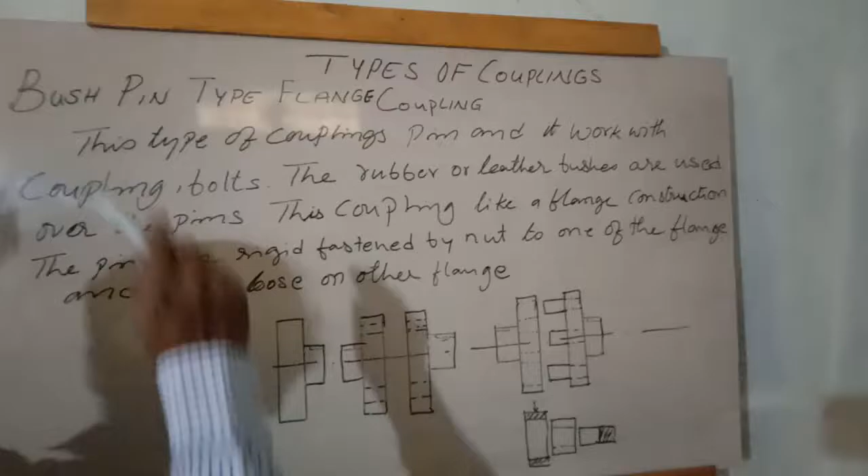This is the bush pin type flange coupling. As I told before about flange coupling, this is the same like a flange coupling, but extra bush and pin are added to the flange.

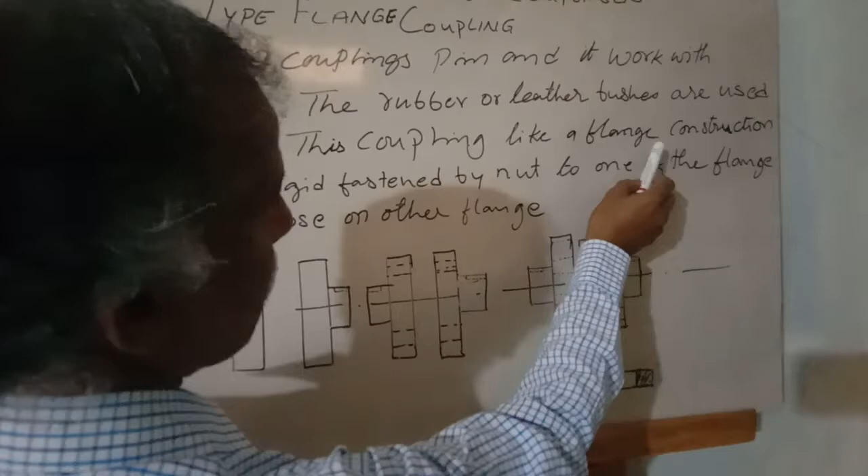This type of coupling works with coupling pins and coupling bolts. The rubber or leather bushes are used over the pins. In this coupling, like a flange construction, the pins are rigidly fastened by nut to one flange and kept loose on the other flange.

This coupling is like a flange coupling, same as a flange coupling with keyway and everything. To fasten these two flanges, to accommodate nut and bolt, we have 4 holes to tighten the two flanges with nut and bolts.

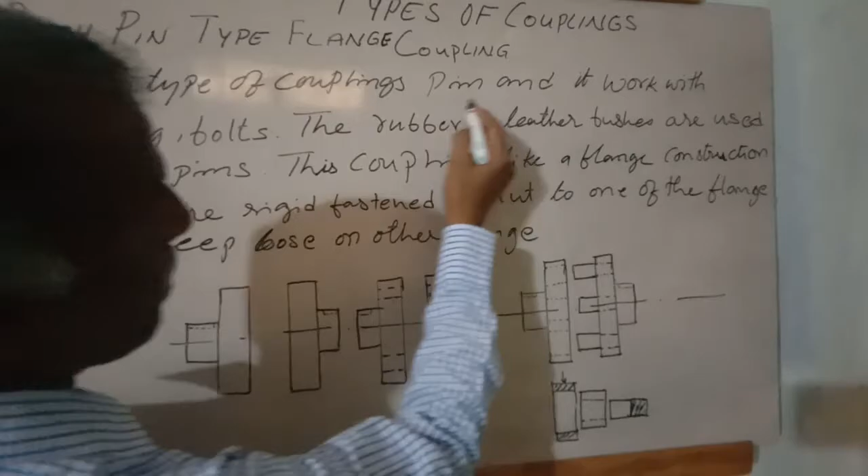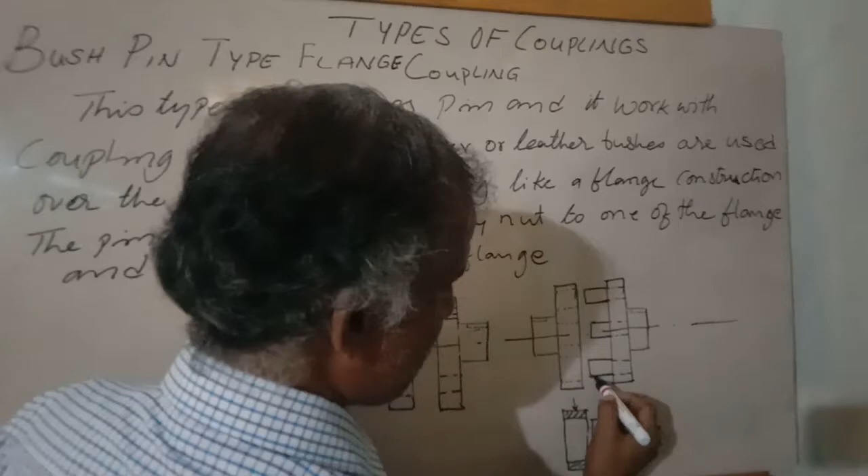This type of coupling works with coupling pins and coupling bolts. Here, excluding the nut and bolt holes, there are 6 more holes for one flange, which have more diameter than this pin. For one flange we have 6 holes of bigger diameter than the pin diameter. The other flange has 6 pins which are fastened into the flange with a thread system.

These 6 pins are fastened to this flange by a thread system. So for one flange we have 6 pins, and 4 holes to tighten the two flanges. These 6 pins will enter into the holes on the other side of the flange.

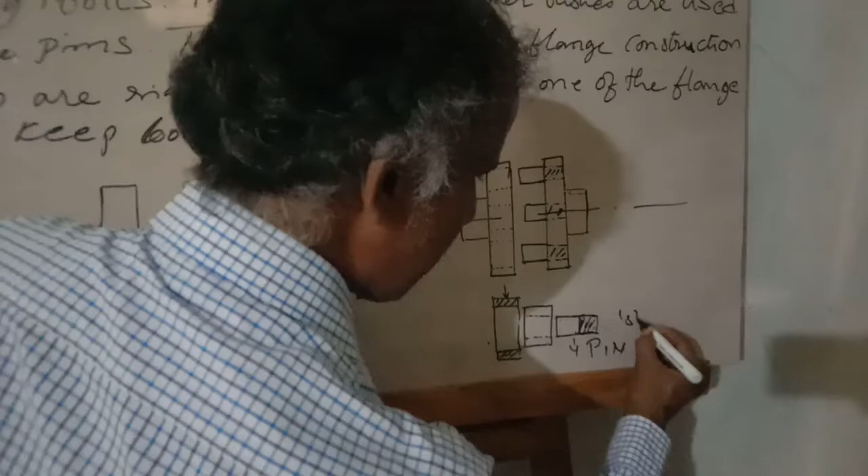This flange hole is small - this is a pin, this is a pin. This is the first flange, and the second flange has a hole wider than the pin, which accommodates the bush.

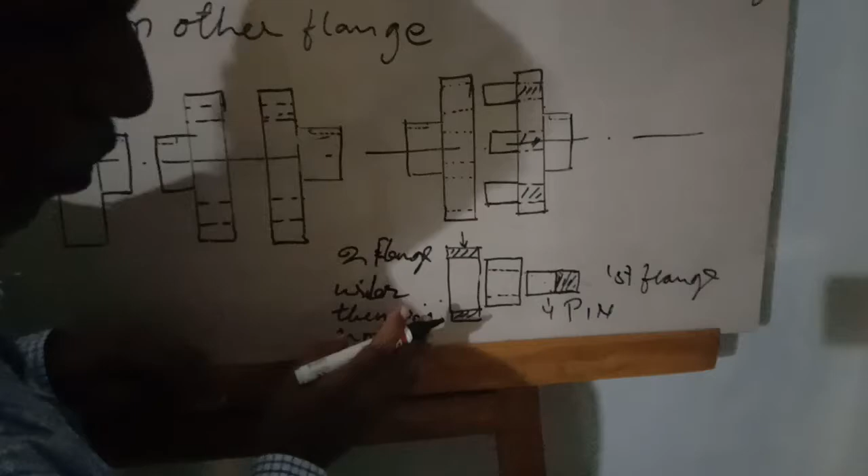This hole has more diameter than the pin - it is very loose, with some clearance in between. To fit this clearance without gap over the pin, we insert a leather bush or rubber bush. This will be slightly undersized to the pin. The pin has a chamfer at the start, so by pushing it will enter into the bush.

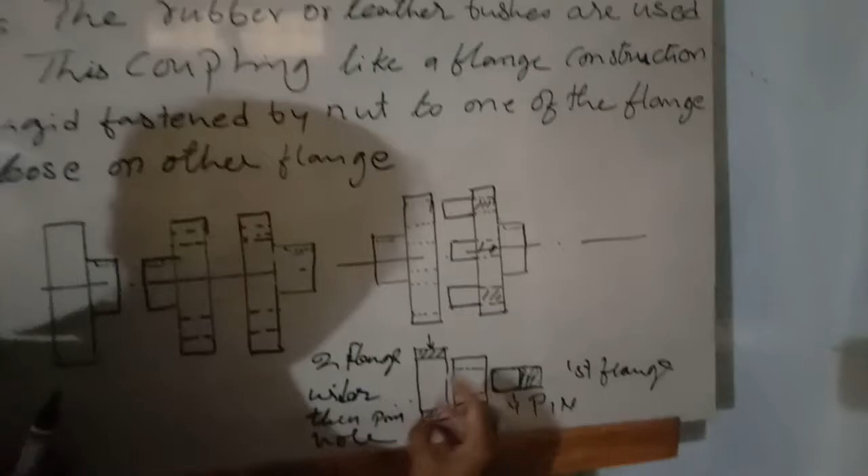Here is the first flange after fixing the shaft on either side. Now we will fix the rubber bush or leather bush over the pin, and with this bush it will enter into this hole.

It will enter into these holes without any clearance, because this leather and rubber has elasticity, and it will fit. These two flanges are fitted with nut and bolt.

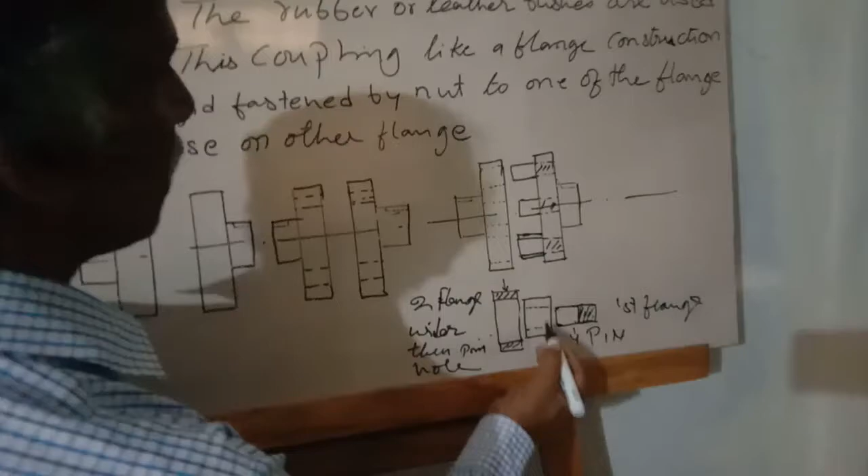This bush pin type of flange is used where slight misalignment of the shaft axis takes place. It will automatically adjust due to the cushion of the rubber and leather, bringing it into line with the shaft axis. Then we put nut and bolts, checking and tightening. After tightening, even if the alignment is slightly different, when running it will get self-aligned due to the cushioning of the rubber and leather.

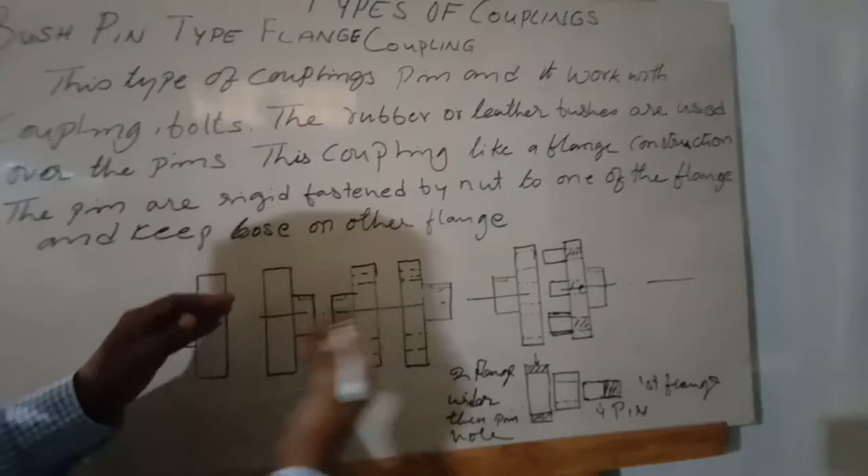So this bush pin type flange is nothing but a flange which has pins, and the other side of the hole is bigger size to accommodate the bushes. This is one type of coupling - the bush and pin coupling.

Now this is chain coupling. In this chain coupling, the two sprockets on the two flanges are driven by the chain system - that's why it's called chain coupling. The flange replaces a sprocket on each shaft.

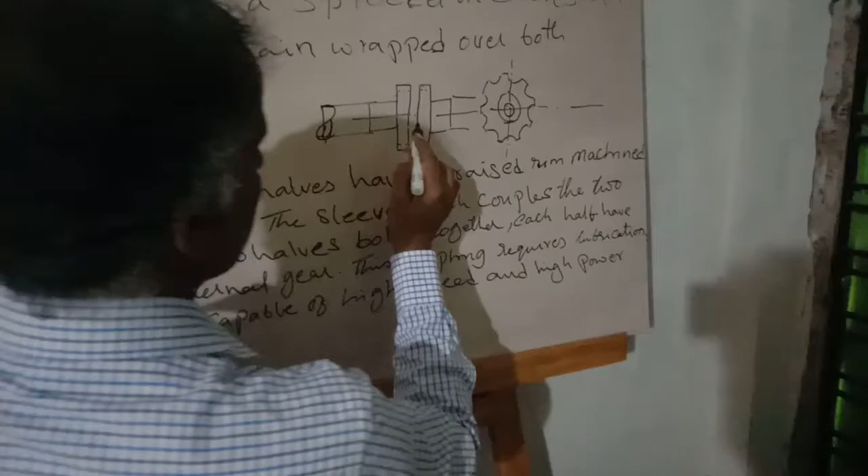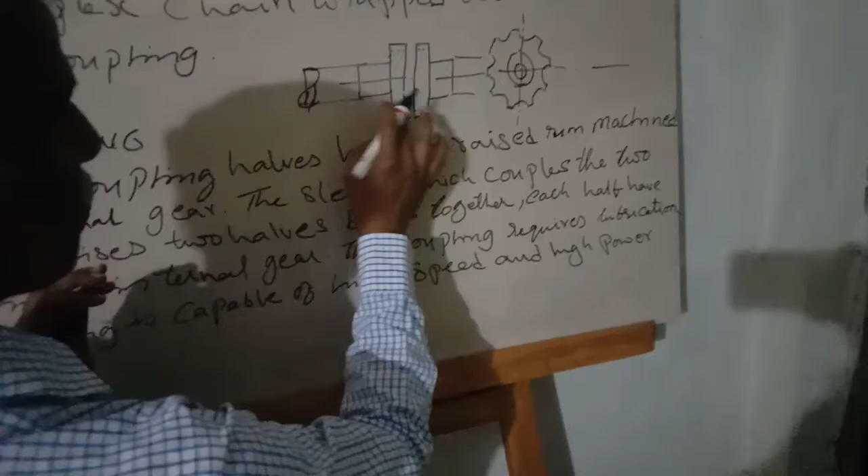When you fix the shaft to this flange on both sides, this flange is in the shape of a flange, but at the end of the shaft, excluding the holes and all, this flange's outer diameter is made like a sprocket, a chain sprocket - for example, like a cycle's crank wheel and backside sprocket. This sprocket is made integral with the flange, on both flanges.

After that, the shaft is fixed and the sprocket is brought nearby. After aligning these two shafts, the flanges which replace sprockets on each shaft are wrapped over by a duplex chain, covering both adjacent couplings - side by side couplings are called adjacent couplings.

Here, duplex means it's like a cycle chain - a single length chain. But in a duplex way, it's a single chain that accommodates two sprockets at a time.

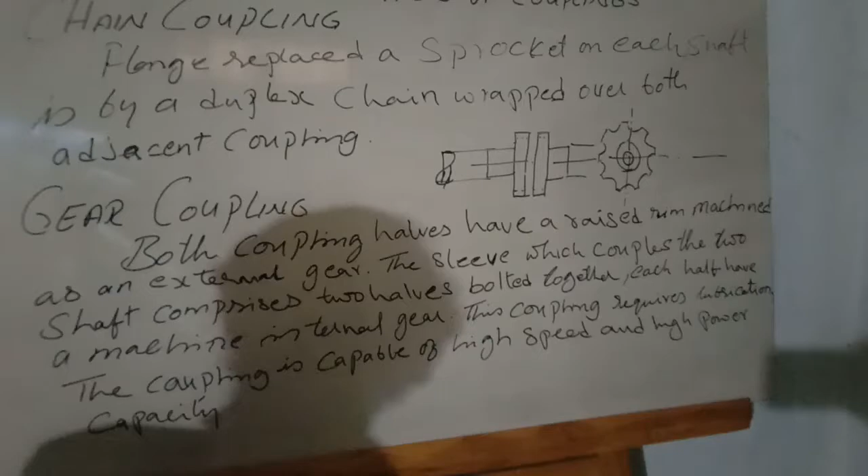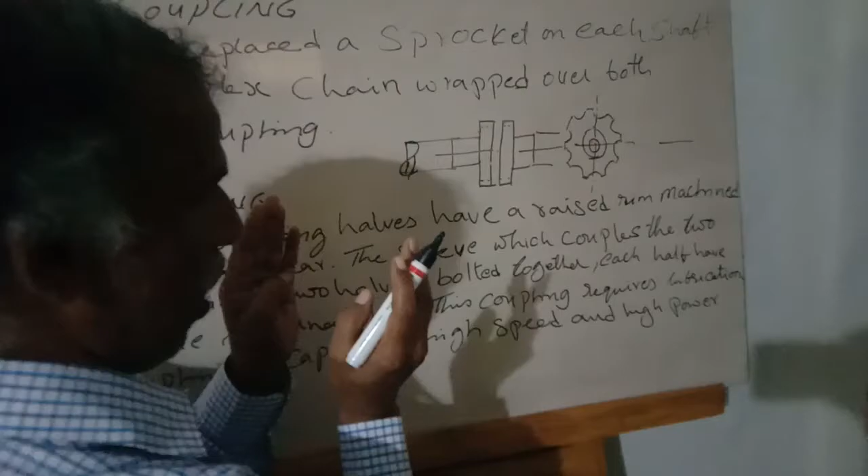This cycle-like chain is exactly wrapped over the sprocket without any looseness or interference - exactly fitted, link by link. Over this sprocket, under the cover, everything is fixed. After fixing this flange, a guard is placed over it like a safety cover, for oil seal, along with gaskets and everything - it is fixed.

It is filled with the lubricant, and it needs lubricant also when it is running. So when the prime mover is running, the secondary mover of the shaft also will run by joining the sprocket

with a duplex chain wrapped over both adjacent flanges. Now next one is gear coupling. In this gear coupling, both the coupling halves have a raised rim machined as an external gear. Let me draw a sketch here. This is a gear coupling. Both coupling halves have a raised rim machined as an external gear.

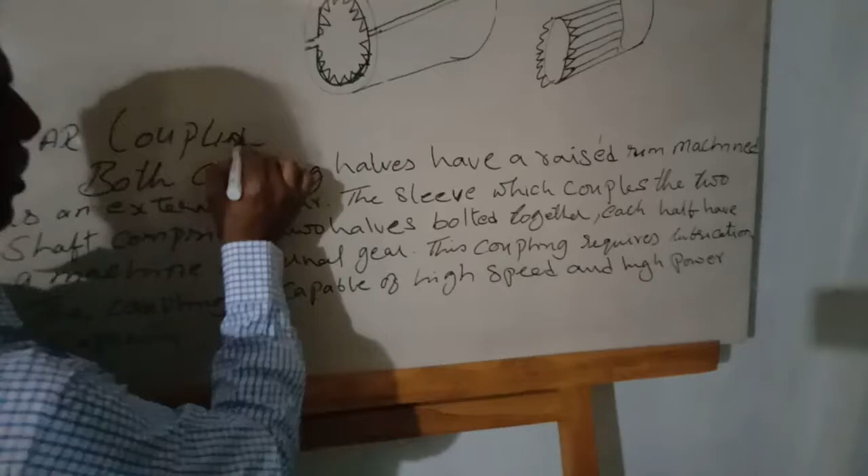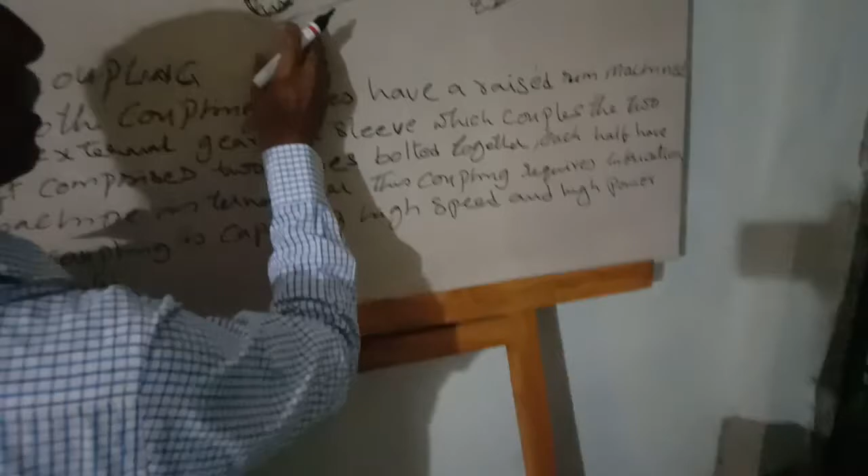So in this gear coupling, the two halves of this sleeve are a flange. If you want a flange coupling with gear, it will go to the muff or sleeve coupling. So this sleeve and muff inside, internal gear teeth are cut like a gear internally. The muff coupling's internal surface gear teeth are cut. Same way, the shaft we are connecting also has external gear teeth cut on it, like a spline shaft.

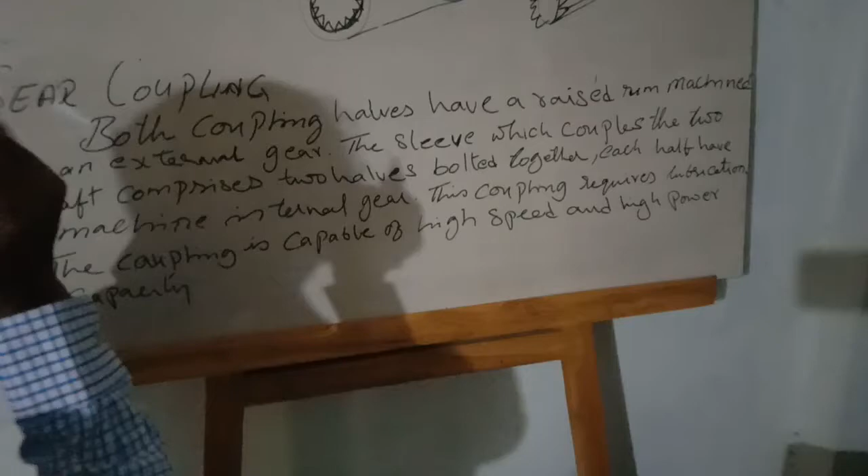This gear exactly meshes into this coupling. Now the first half is placed, and the two shafts are placed on either side. Then the top half is placed and crimped together with the nut and bolt. Compressedly it is fixed. Both the coupling halves have a raised rim machined as an external gear. The sleeve which couples the two shafts comprises two halves, bolted together with nut and bolt. It will crimp and compress the fitted bolts together. Each half has a machined internal gear.

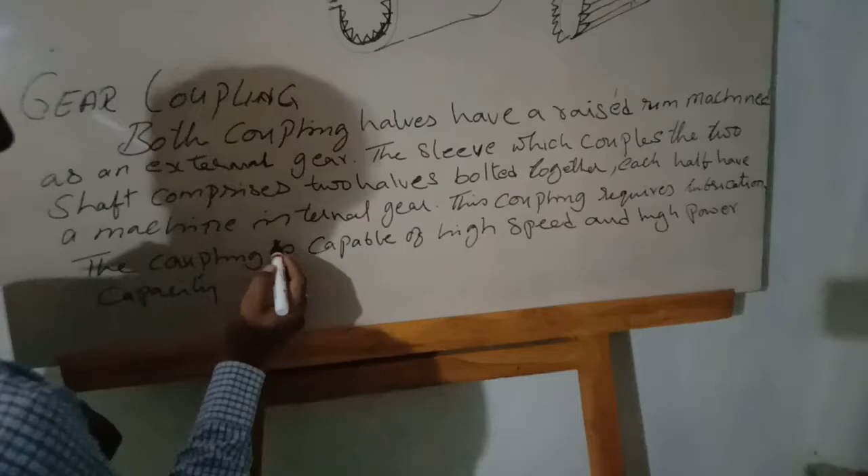This is the internal gear, this is the external gear. This coupling requires lubricant. The coupling is capable of high speed and high power capacity. This type of gear coupling has high capability, high speed and high power capability. There is no loss of slipping, and this is the gear type.

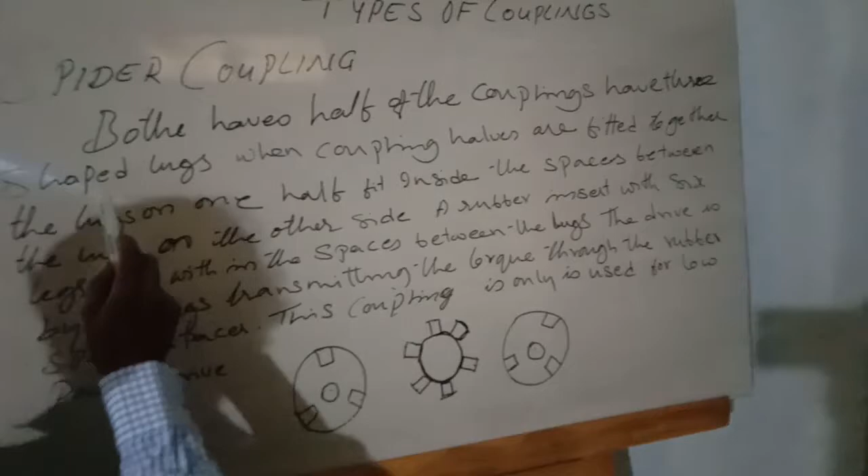Next one is spider coupling. Both halves of the coupling have three shaped lugs. See here in the flange, ordinary flange, like this, three lugs are made - 2, 3 lugs.

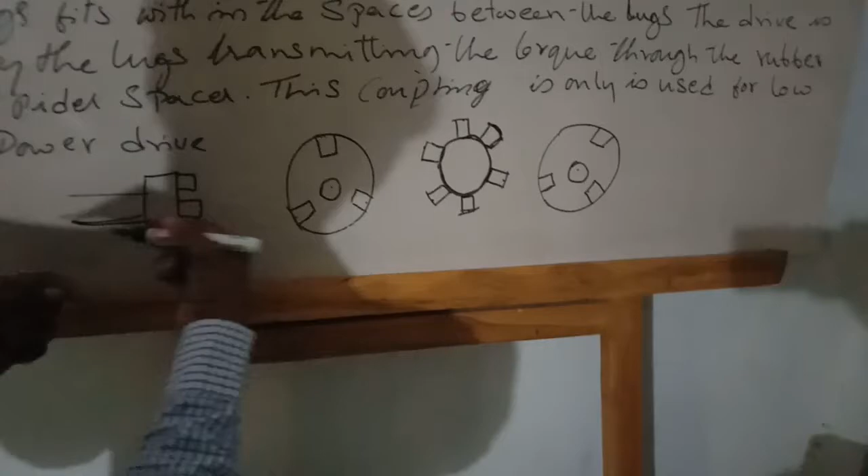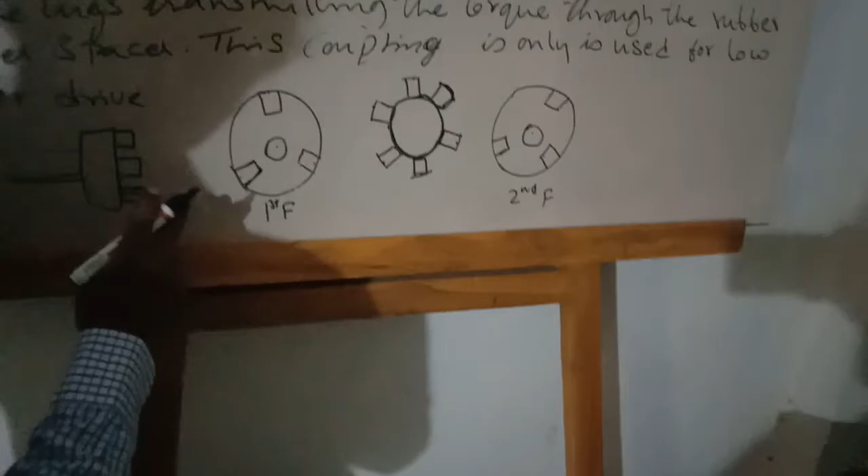The lug is made as an integral part, machined, not like a pin which we fit with a nut and bolt. It's an integral part of the flange. These are lugs, not pins. Pins are round in shape, lugs are a little bit square, tapered, like a sector from the center to bigger diameter. So for each flange, first flange, this is second flange. For each flange, 3 lugs are made. Both halves of the coupling have 3 shaped lugs.

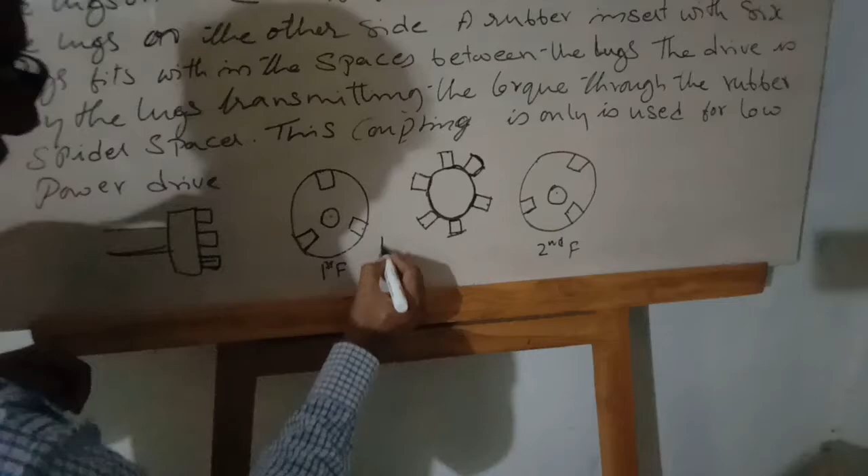When coupling halves are fitted together, the lugs on one half fit inside the spaces between the lugs on the other side. So when these two flanges come together, these lugs go in like this. After these lugs go inside, there will be a gap between corresponding lugs, same width as the lug width, example 10mm. This is also 10mm. When these two couplings mesh together, for each corresponding lug, there will be a space of 10mm. So after fixing these 3 plus 3 lugs, there will be a 6 space gap - 6 spaces will be there.

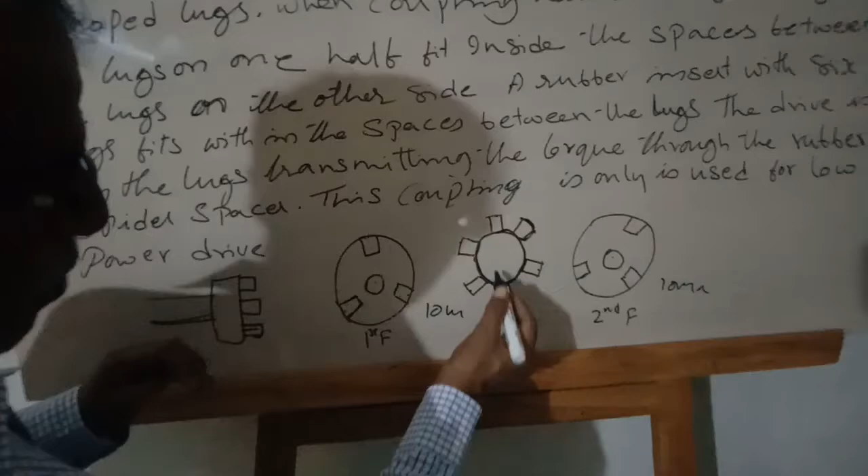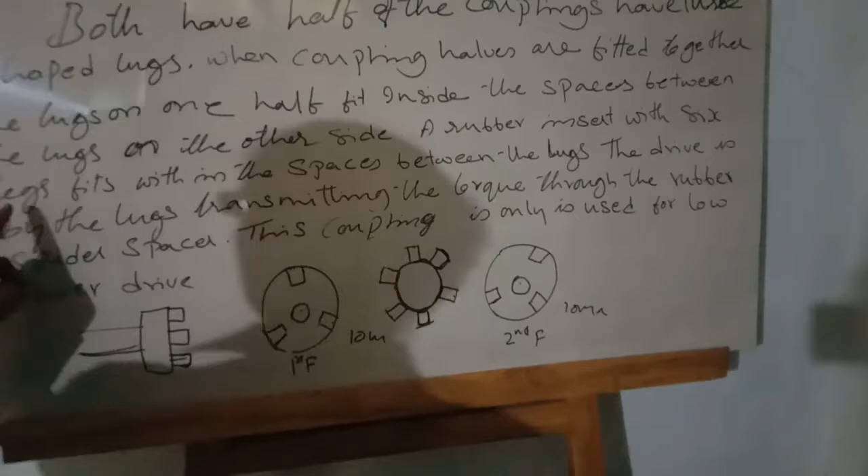With the same width of 10mm, a rubber mold is made with 6 lugs equally spaced. This 6 lugs exactly fit into this - see, this rubber fixes into this. After fixing this rubber lug, one touches the metallic lug. There will be a space of another 10mm, which fixes the other flange into that. So what is explained here: both halves of the coupling have 3 lugs, with spaces between the lugs on the other side. A rubber insert with 6 lugs fits within the spaces between the lugs. The drive is transmitted by the lugs through the rubber, transmitting the torque.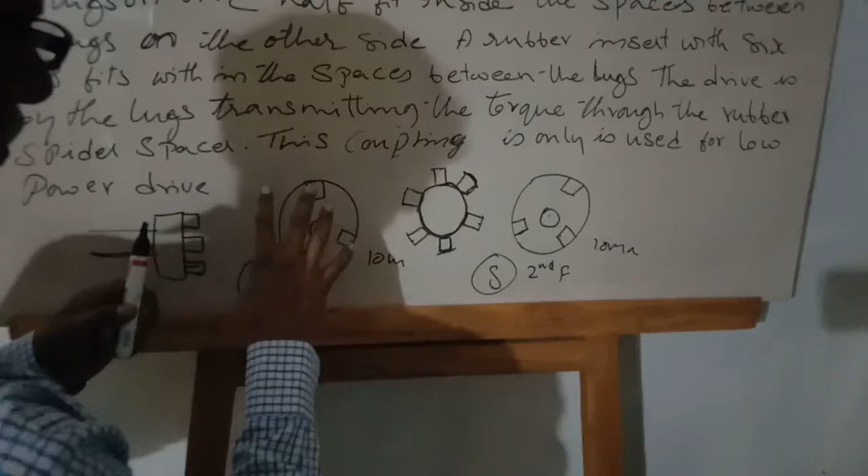So this is the prime mover, this is the secondary mover. When this one starts, it drives the rubber and the rubber drives this one. See this spacer, the rubber we fixed inside this insert, it is like 6 legs, like a spider. So it is called a spider coupling.

We can especially see this in our bikes - the latest model bikes that are coming, the rear wheel, when they open, the main shaft of the chain will turn the tire having the same fitting in the bikes also with this rubber and all.

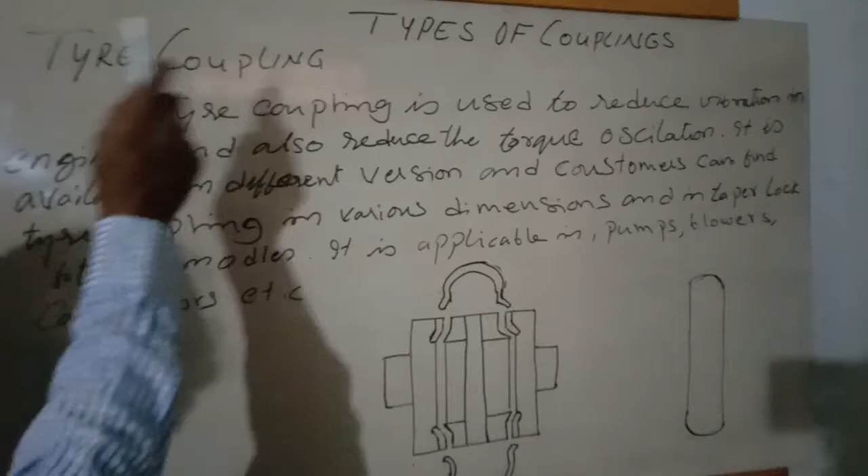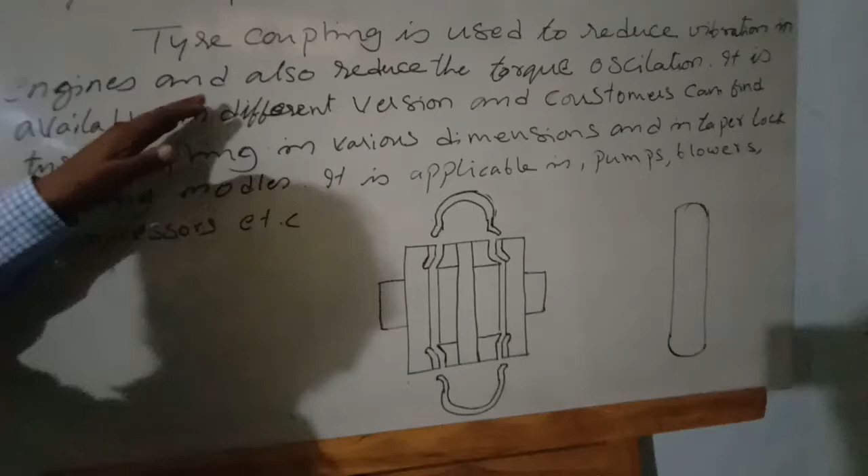A tire coupling is used to reduce vibration. Due to the tire rubber cushion system, it reduces vibration in engines and also reduces torque oscillation. What is torque oscillation? When running out of the center, if there is any difference between the axis, due to the torque, it rotates easily because it is out of the flange.

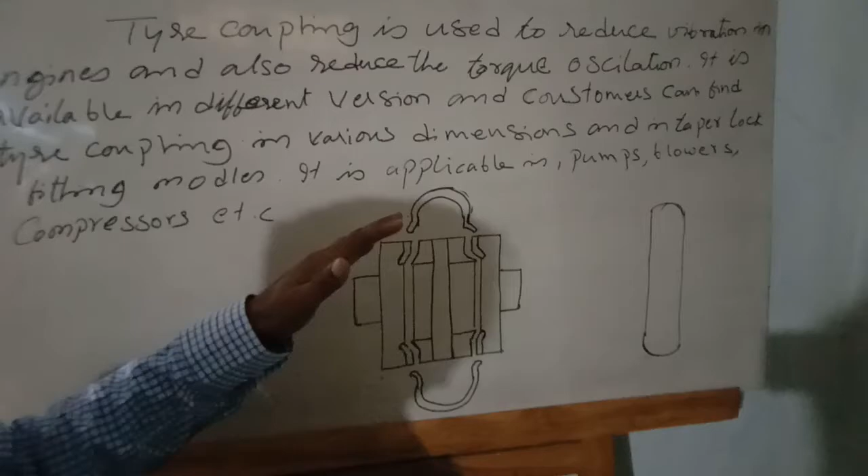It is available in different versions. Customers can find tire coupling in various dimensions, different diameters, and in taper lock fitting model. Taper lock fitting model - what is taper? Here's an example.

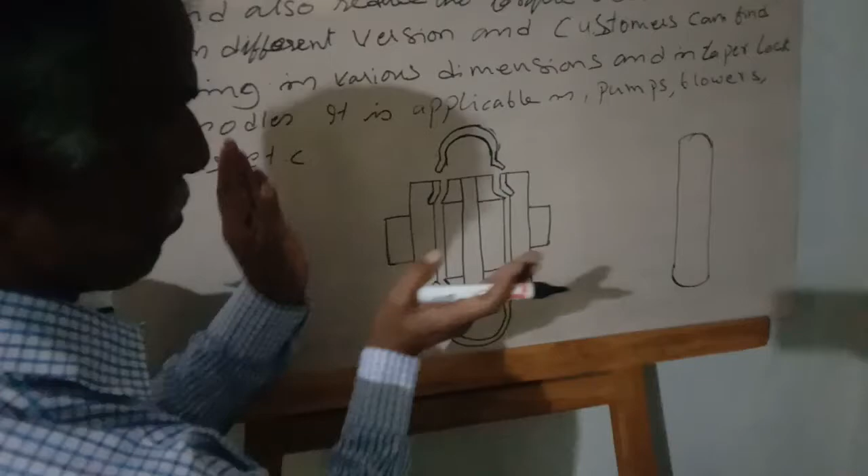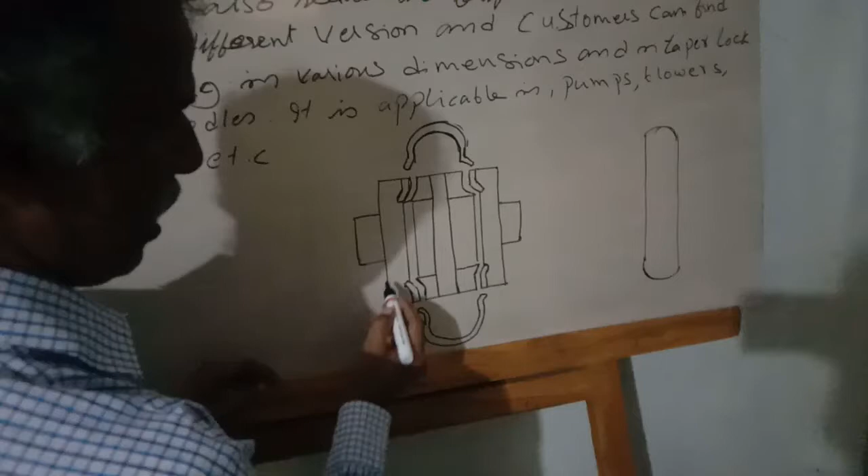When a cycle or scooter tire is inserted into the two rims, the end of the tire is tapered like this - the tire fits inside where we insert the tube. In the same way, the flange is made into pieces, one for the shaft, both are fixed. After fixing this tire, the same taper tire will be fixed in this place. The other side of this coupling has the same taper placed like this, and it goes inside.

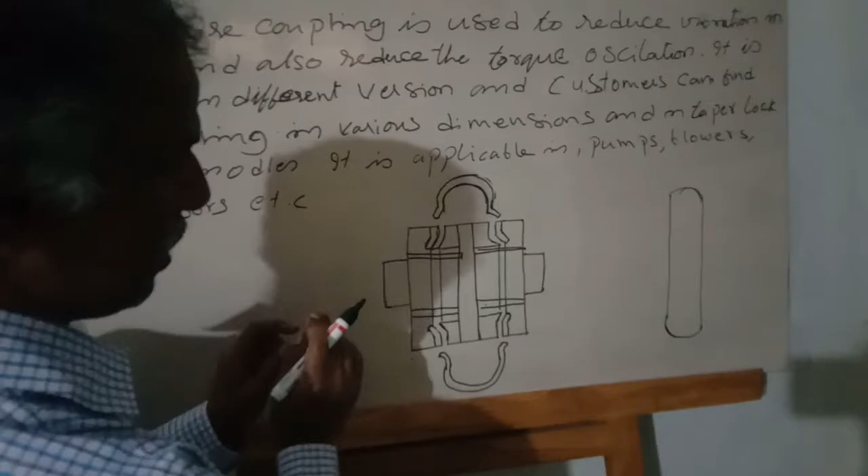Both sides are fitted with nut and bolt. After fixing this, due to the taper, this rubber will not easily come out. It's like when we fix two washers between metal pieces and tighten - the washer will not come out. Similarly, between the two parts of the flange, this taper is inserted and bolted, making it rigidly fixed. Because they use tire shape rubber here, this is the same tire material inside, with ply threads too. That's why this is called tire coupling.

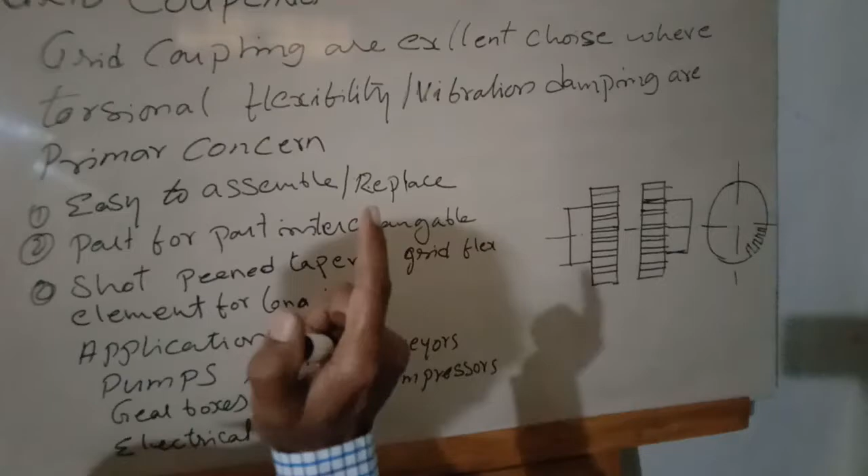This is grid coupling. Grid couplings are an excellent choice where torsional flexibility and vibration damping are the primary concern - where there's a need to reduce torsional flexibility and vibration, these grid couplings are used.

Grid couplings are easy to assemble and replace, and parts are interchangeable. The shot peened tapered grid flex element is for long life - this is the main part connecting the flanges.

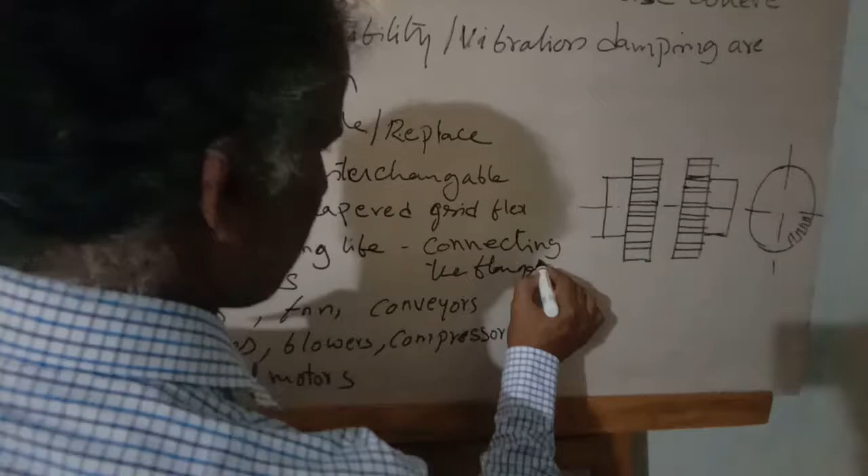We'll see the applications later. This works the same as a flange - on the outer diameter, grooves are cut in the same pitch all the way around the flange. Then a flexible spring-shaped wire, a single piece, is readily available like this.

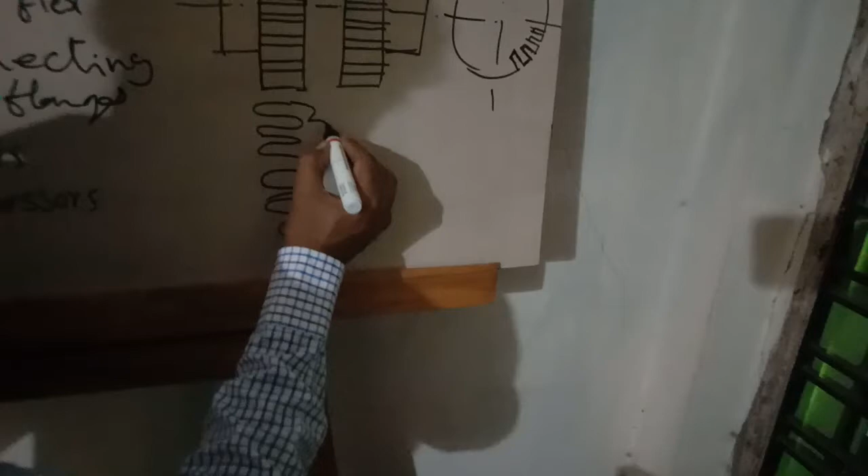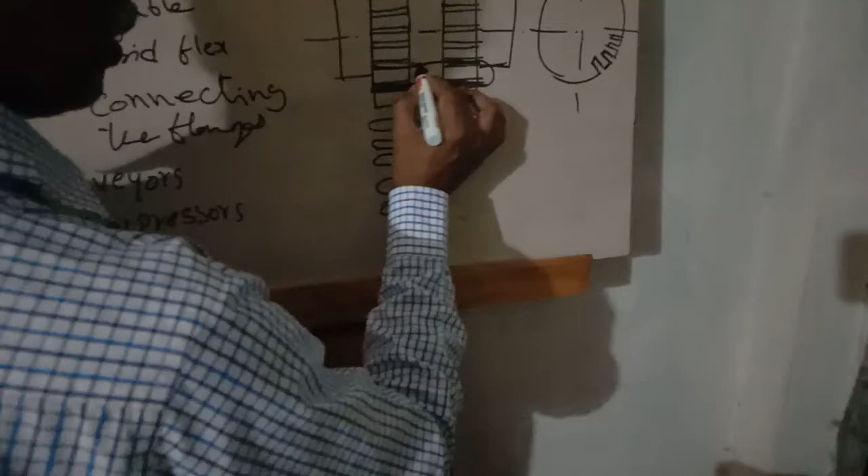This zigzag spring - the shot peened tapered grid flex element - is fixed into this. First, take a flexible rope or wire and place it in the groove. You put the wire in the groove and bend it, then it passes through again, bending it repeatedly through each groove.

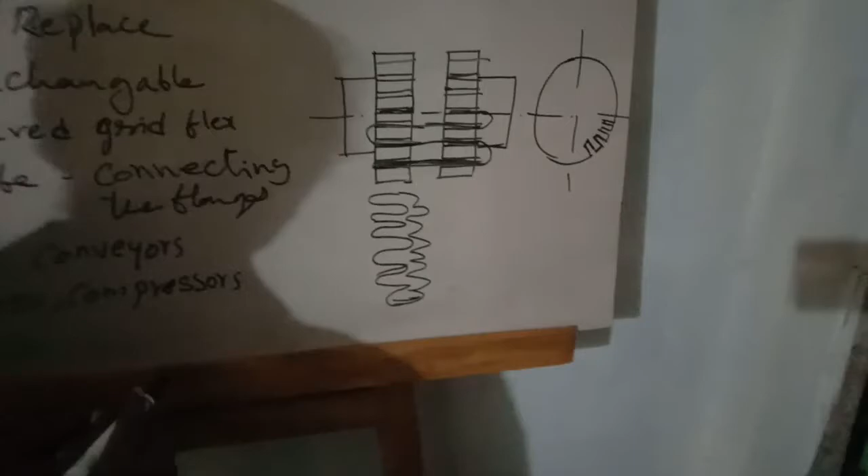When these two couplings are fixed together with nut and bolt, they are coupled, and this wire is fixed right around, but it's designed in a zigzag way, like a rubber band. They pull it and fix it in. After that, to protect this wire while running and prevent it from coming out, they put a guard that won't allow the wire to open from the grid. So the wire is knitted like a grid, zigzag all the way around - these are all easy to fix and interchange.

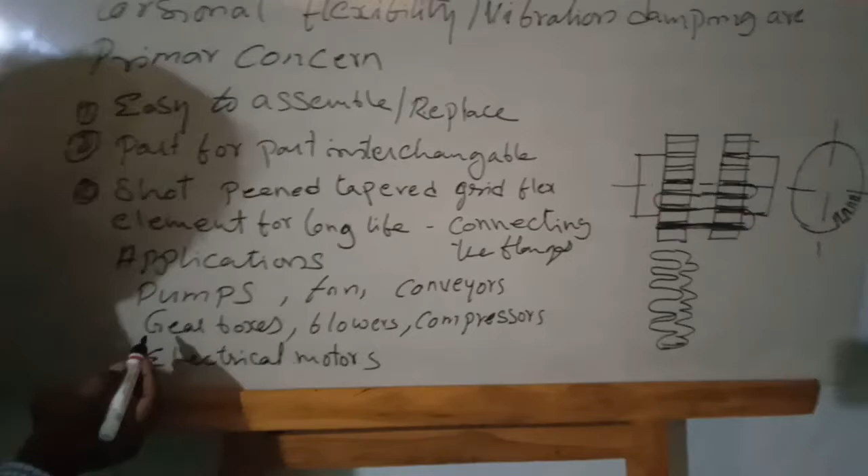The applications where these grid couplings are used include pumps, fans, conveyors, gearboxes, blowers, compressors, and electrical motors.

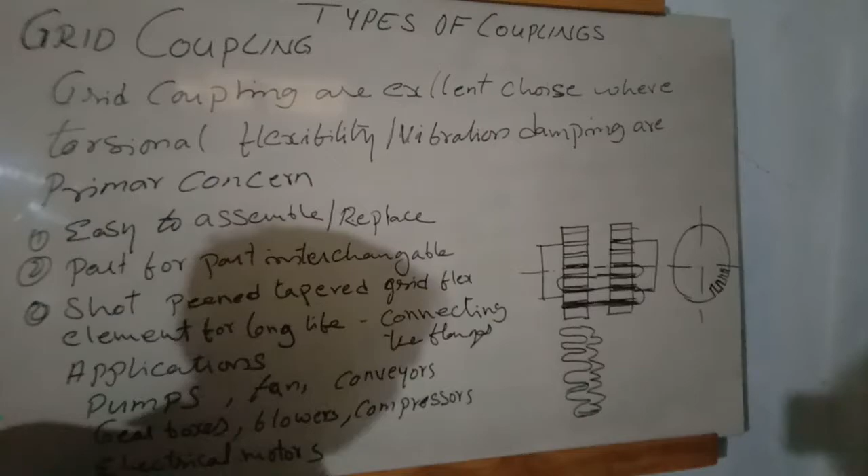In modern generation, due to new technology, machines have to work according to new systems. So engineers are designing different ways of couplings to suit the machine. Many couplings are there, a few couplings we generally see.

Next is Oldham coupling. It is used to connect two parallel shafts whose axes are at a small distance apart. When these two shafts are fixed, the shaft axes are not coinciding. There's a little difference, a small distance apart. In that condition, they will use Oldham coupling.

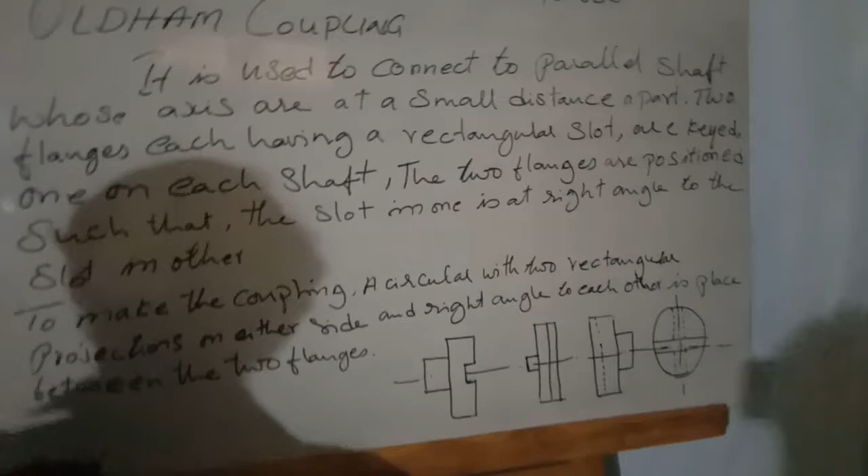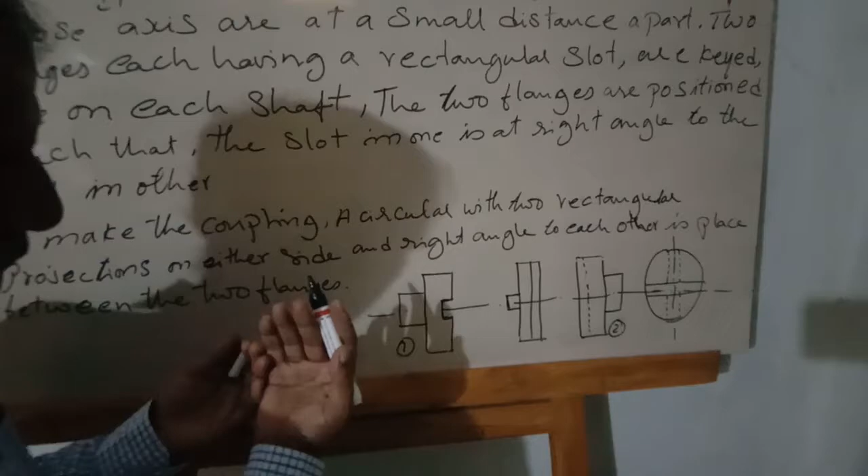Now, two flanges, each having a rectangular slot from the center. So these two flanges, flange 1 and flange 2, are each having a slot. Same way, two flanges having two slots, fixed in a rectangle shape. If one slot is vertical, the other slot will be horizontal. One slot is horizontal here, and in the second flange, a vertical slot is shown in hidden lines.

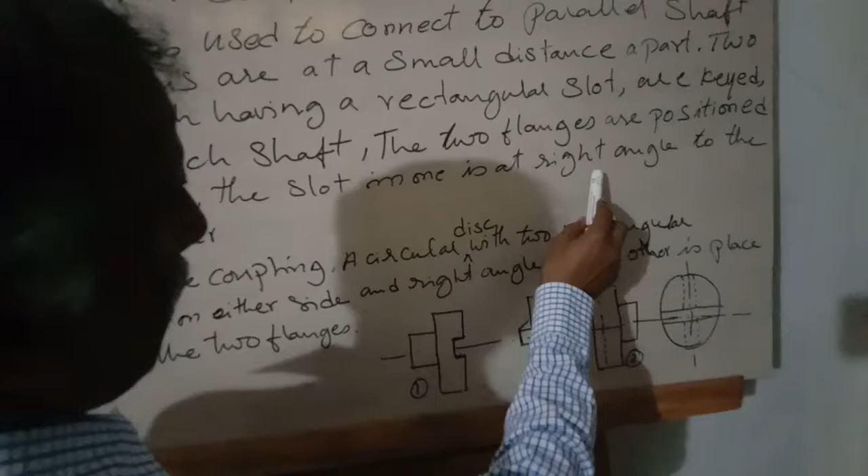Now, excluding these two flanges, the third piece used in between is a disc. The two flanges are positioned such that the slot in one is at right angle to the slot in the other. So these two flanges are the same, having a slot, positioned at right angle, one vertical, one horizontal, with the help of a disc placed in the center.

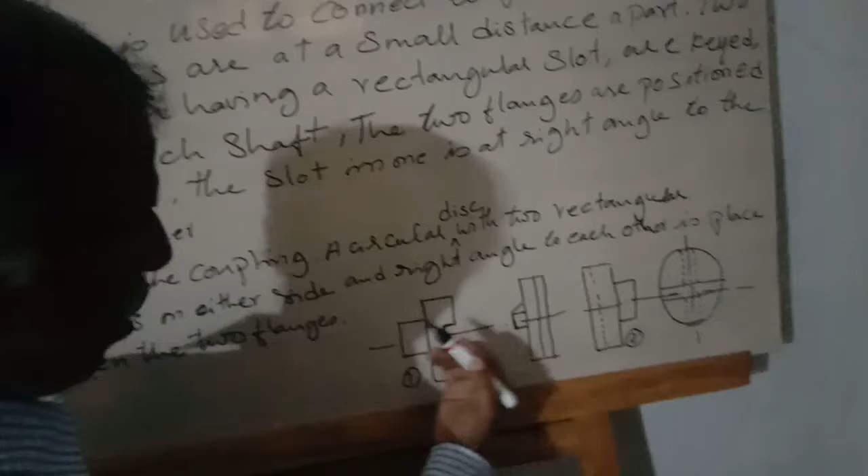So the disc that makes the coupling is a circular disc with two rectangular projections on either side. A plain disc has a rectangular projection outside. This flange has a female feature, and the disc has a male feature, a projection outside. The other side of the disc also has a slot. This projection on the other side is crossed, one vertical, one horizontal.

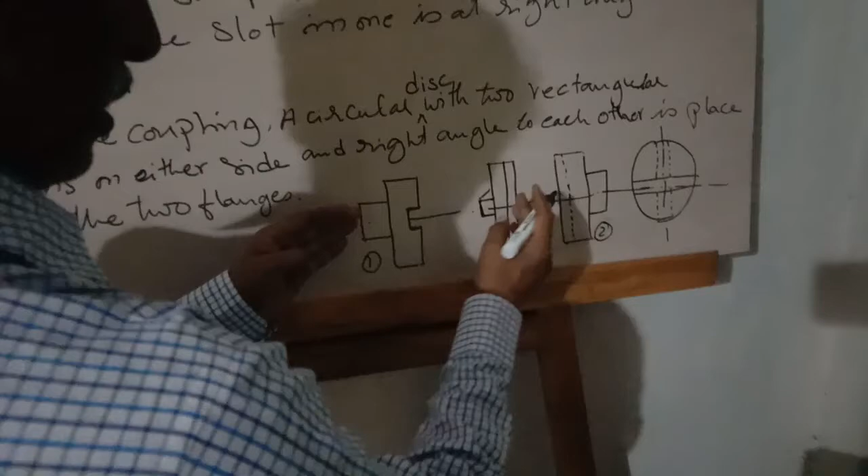So due to this disc, when it is positioned in this slot, the other projection will have a vertical orientation which will position the other flange on the vertical side. So the shafts are fixed together and the disc is fixed, bringing the shafts closer. As I said, there's a small distance apart, the axis is not coinciding, the line is not coinciding, there's a little difference in this axis.

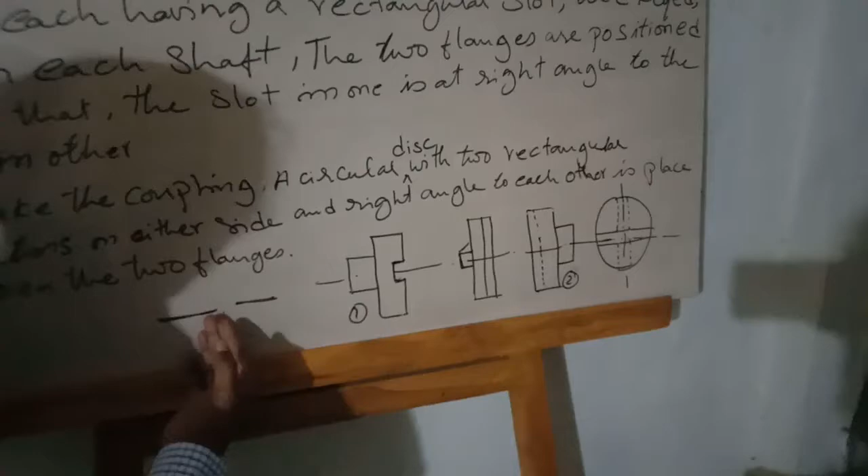To coincide this, the disc will slide on both sides. In flange 1 it will slide, and in flange 2 it will also slide up and down. So when it is rotating, however much the disc was apart from the axis, it will continuously bring them to center while rotating. So this is called Oldham coupling.

So these two flanges are fixed with the disc, not with nut and bolt, it is a separate piece. When it is running, it will slide in that. The other side of the two shafts, as we said with the previous flanges, is keyway fitted.

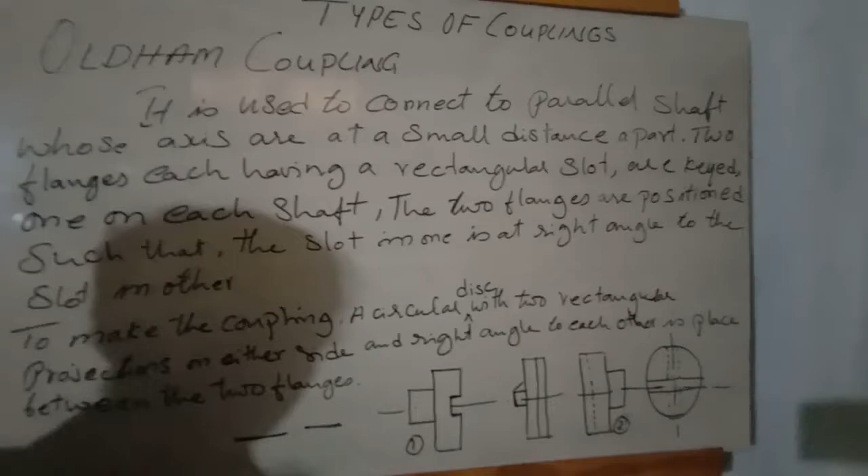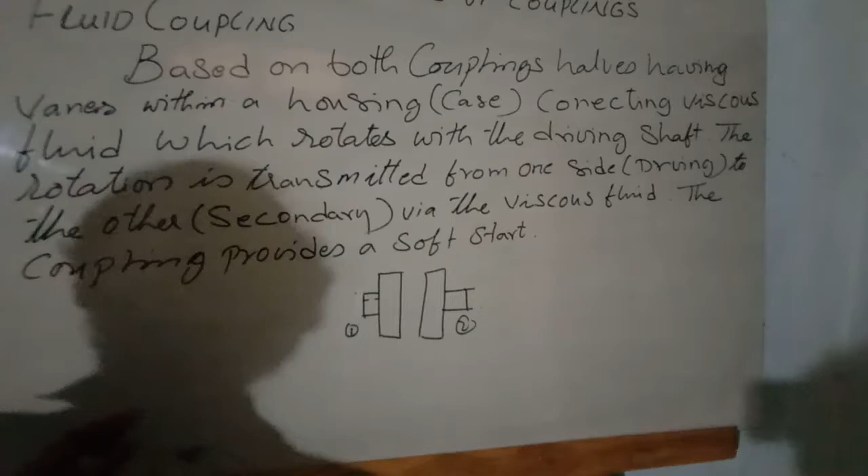These two couplings are not connected with any other elements. Only these two flanges run with a fluid. Fluid makes them run, so that's why it is called a fluid coupling.

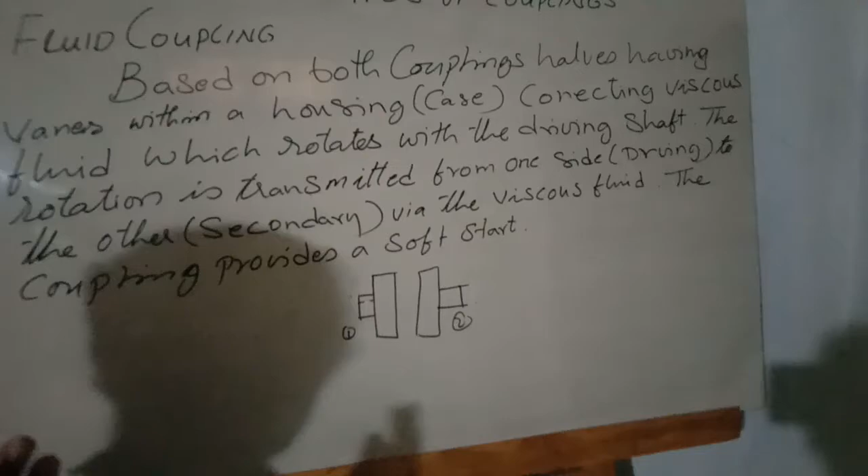Based on the design, both coupling halves have vanes within a housing. See, it is like a ceiling fan with two halves. Excluding the blades of the fan, the two halves in the middle are the same way. Inside is hollow, and inside that hollow, the two coupling halves have vanes.

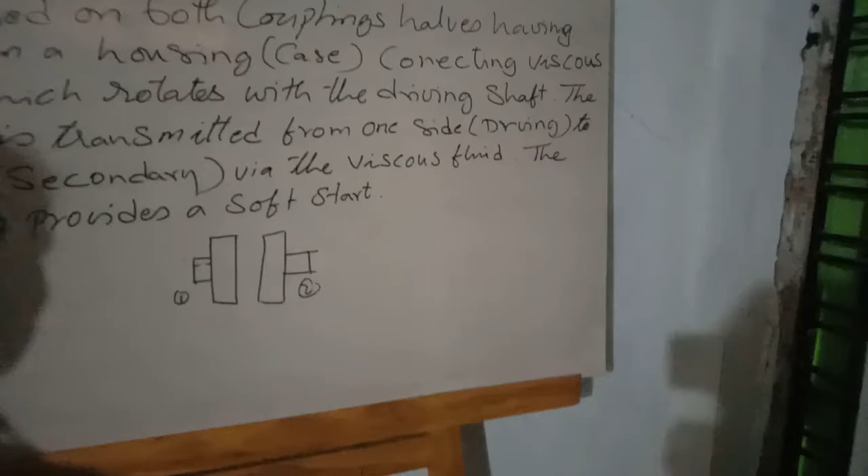See, when our fan is rotating, the blades throw the wind outside. So here the two couplings have an internal fan hollow, in which vane-like structures are made. Example, a mixie blade, you know the jar blade, behind the blades are there. When it is rotating, it will blow the air, throw the air. In the same way, inside these flanges, from the center, there are curved blades like that.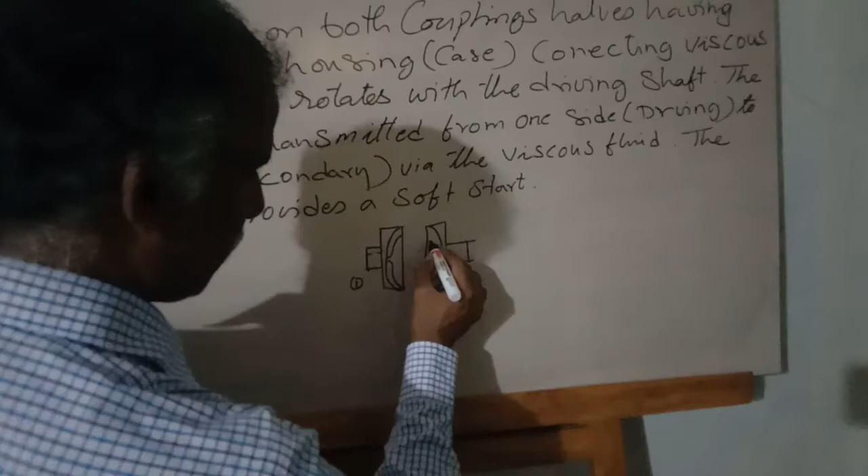Here the shaft is fixed on this side. The reservoir, which is connected to the shaft, will flow the viscous fluid into this flange, the primary flange, and on the next side the fluid is collected and again it will go back to the reservoir. This is the secondary.

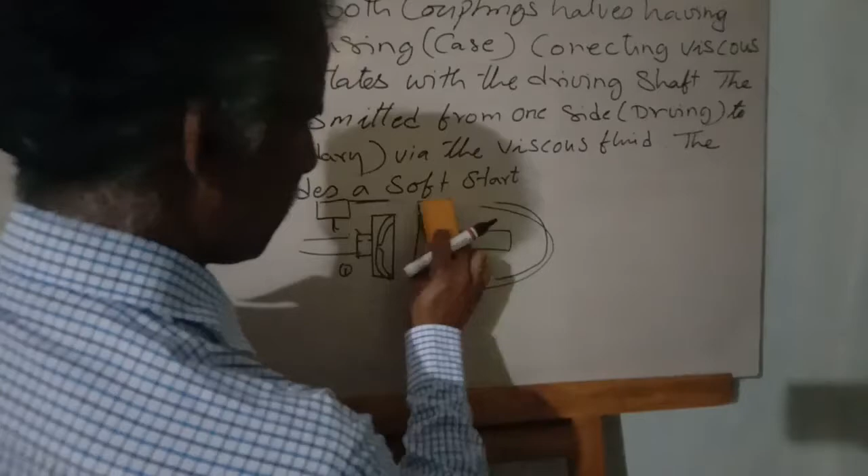Now take an example. Take a football, big football, place it in your room on the board, and with a pipe if you put pressure water onto the ball, what will happen? It will start moving. So how will the ball start moving? With the help of a liquid forcing that ball to move.

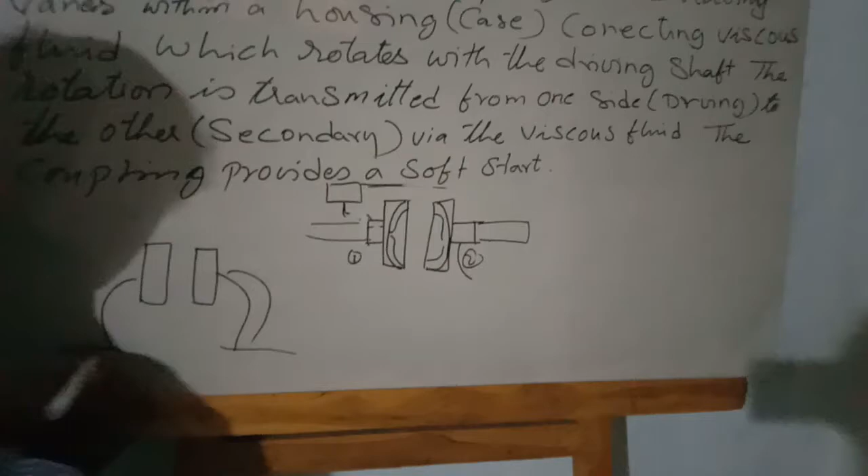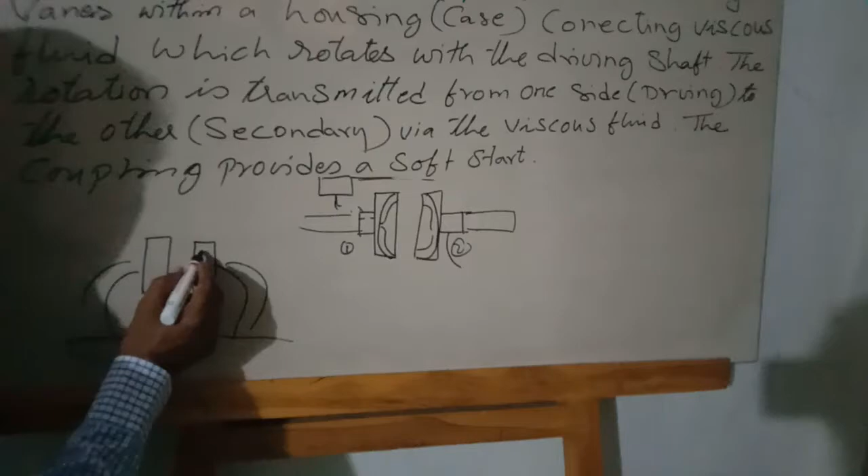In the house you have a table fan. Take two table fans and place them opposite each other. One fan is connected to the power. Power is supplied, the fan is rotating. When the fan starts rotating, it will throw wind to the other side, to the other fan. This wind, when it is pushing forward with pressure, the other fan which is not connected also starts rotating. This means we are transmitting power from this fan to that fan. The other fan is not connected, but this is how it is rotating.

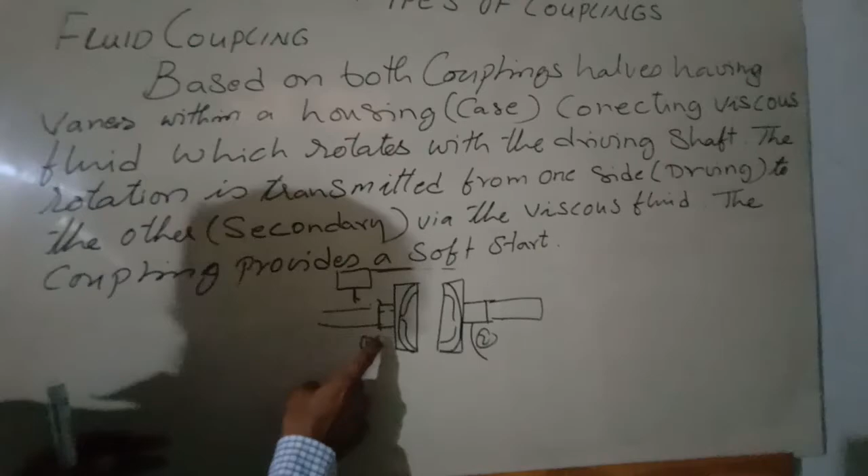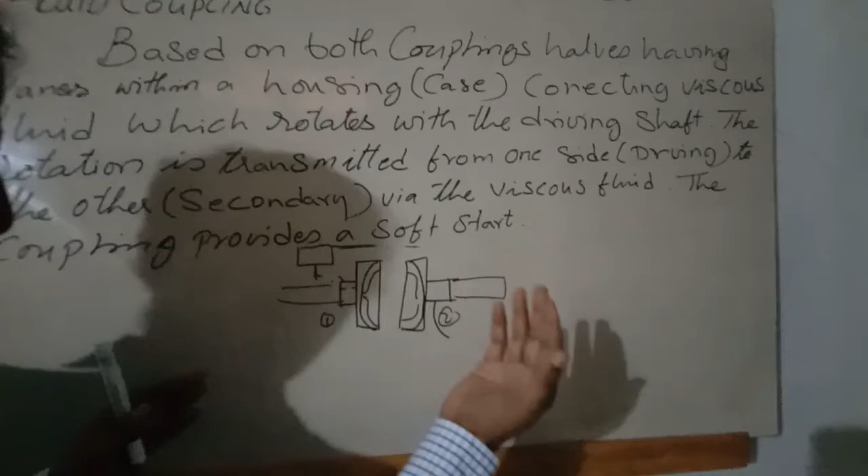So here the liquid which is pumped inside the shaft, inside the flange, when the shaft is connected to the motor, is rotating with great speed. The vanes inside, which are not straight but slightly zigzag, with the help of this force, when it is rotating, push the viscous fluid forcefully by centrifugal force. This liquid pushed to the other side of the flange with heavy pressure makes the other side of the flange also start rotating, as I explained before. The two flanges are connected, so when one shaft rotates, the other shaft also rotates due to the centrifugal force of the viscous fluid.

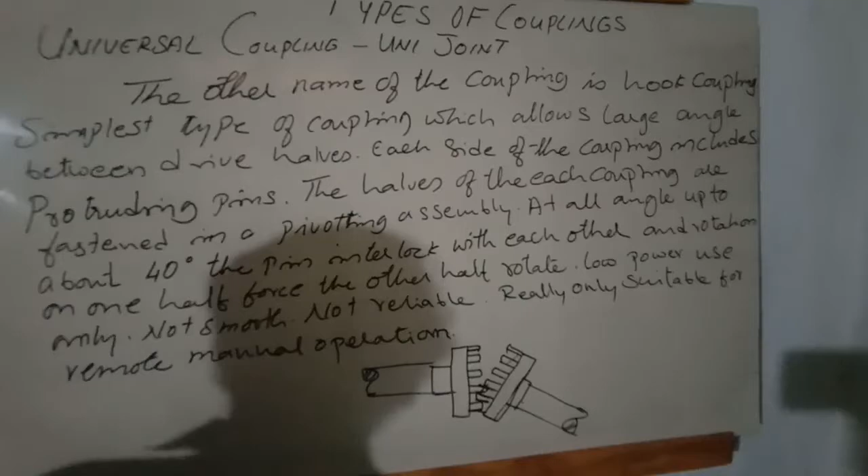Viscous fluid means a sticky, thick substance, either solid or liquid — it is semi-fluid. When this viscous fluid is pumped by these impellers by centrifugal force, the other side of the shaft also rotates very speedily. So this is a universal coupling, or uni-joint coupling.

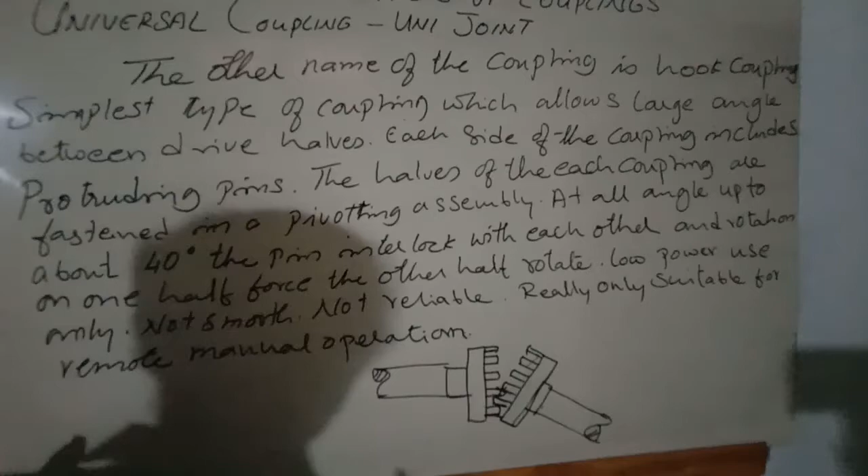We generally see these joints daily but don't notice them, yet we know where they are used — for vehicles, example bus, lorry. From the engine which is generating power, it will transmit power from the engine to a tire which is not in a straight line. Up to some distance it goes straight, and to the rear wheels one shaft is connected at an angle. All of you might have seen this, but might not know how it works.

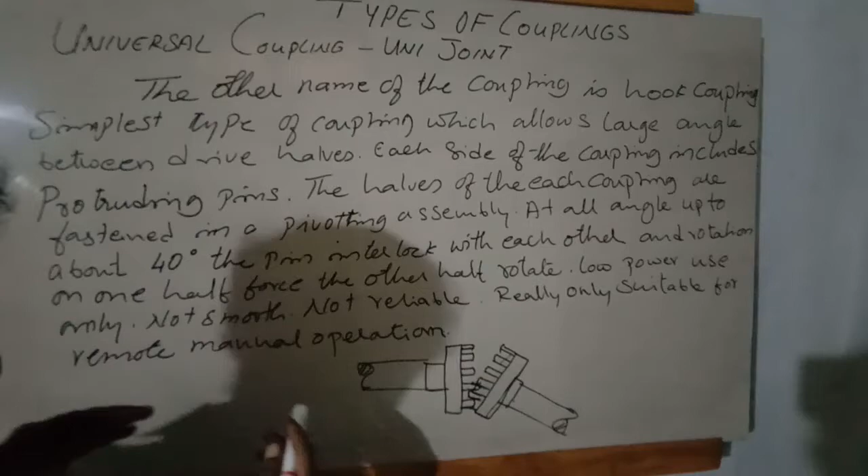So this is the universal coupling which allows up to 40 degrees of angle. Now, other couplings we use are all in axis with the shaft, or slightly misaligned with the axis of the shaft. This is completely different from that shaft misalignment — this is one primary shaft rotating the second shaft at an angle. That's why it's called a universal coupling.

This is the primary. When it rotates, the teeth — at the 40 degree angle — the pins interlock each other and rotate, forcing the other half to rotate too. Low power is used only, and it's not smooth — it will not run smooth. Not reliable, only suitable for manual operations.

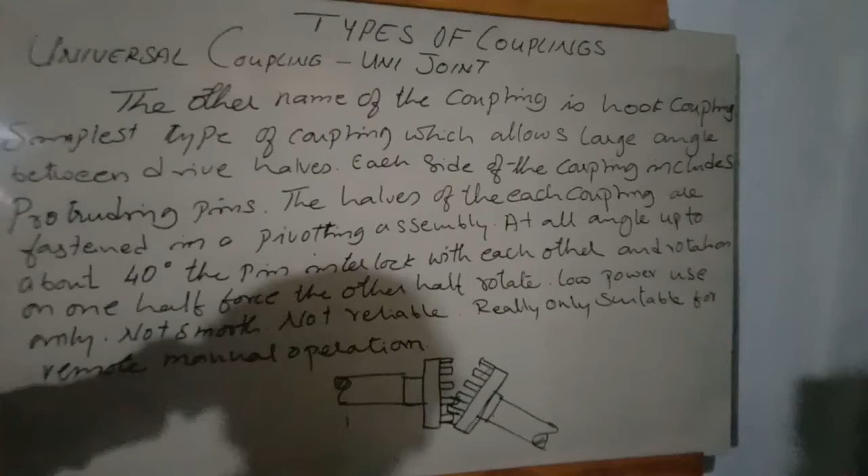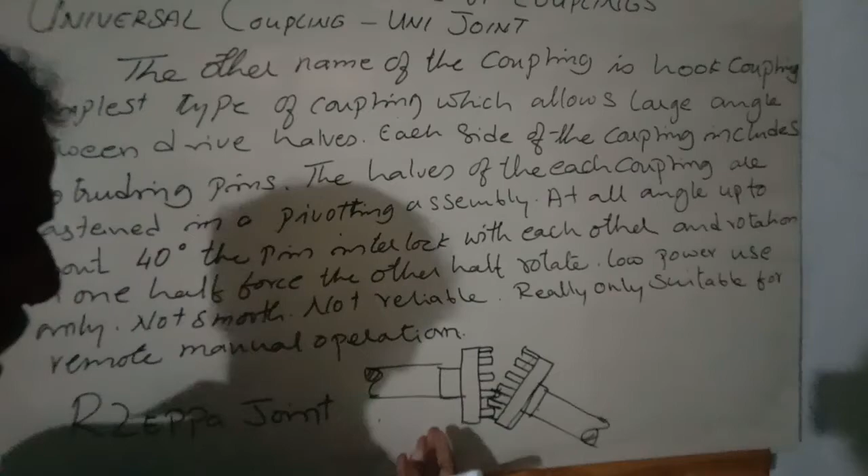So in the same way, this old method I showed here, this universal coupling, is moderated. You might have seen this in your engineering drawing — the universal coupling drawing, freehand sketch. Making this one a new technique, a new way of transmitting power from the primary shaft to the other shaft at an angle, from 20 to 40 degrees — up to 40 degrees we can do.

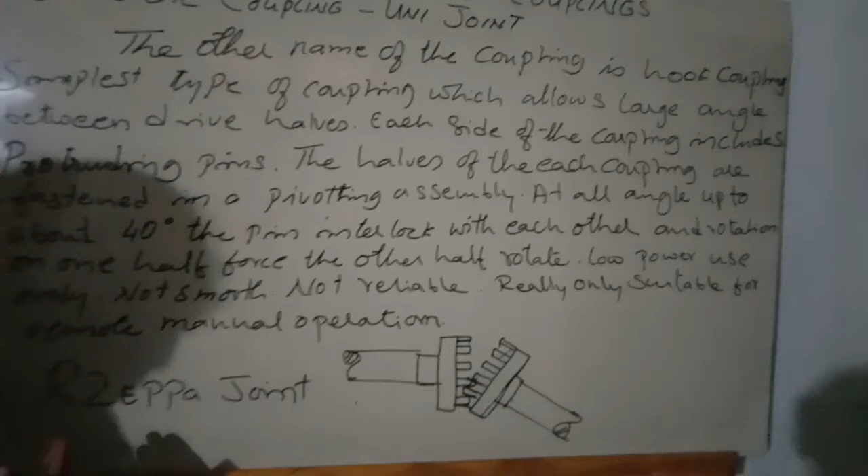In the Rzeppa joint, one type of universal joint, this has no backlash, whereas the universal coupling has a backlash too, a little gap between the teeth. When the vehicle starts accelerating, it will give some sound; after picking up speed it runs a little more soundless. To avoid this sound, there is another universal joint — a kind of universal joint transmitting power at an angle, but given a different name, the Rzeppa joint.

It is complicated for me to draw this on the board, so if you want, you can check on your cell phones for the Rzeppa joint. This covers all the types of couplings that are used.